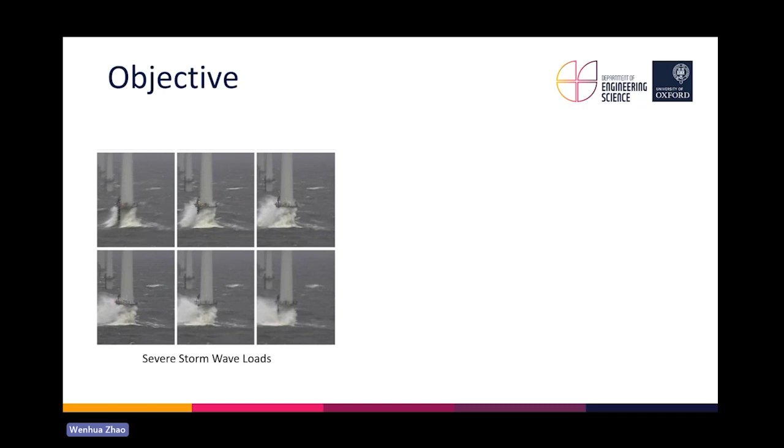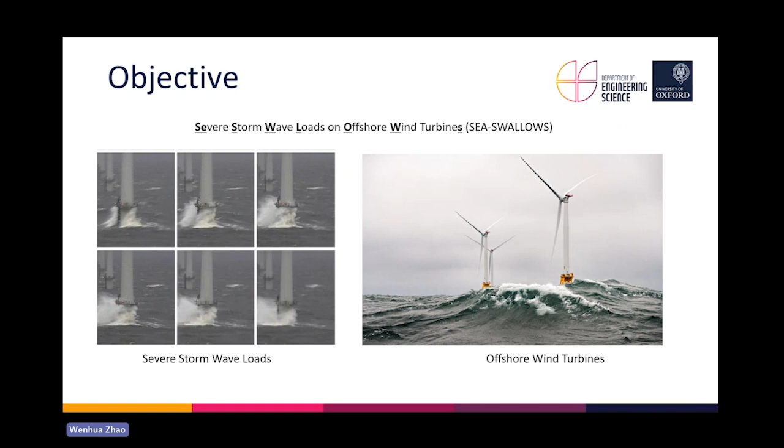Because we are trying to build offshore wind in much deeper water with larger diameters, these hydrodynamic loadings become more and more important. The entire project, Sea Swallows, is really about severe storm wave loads on offshore wind turbines. This is actually quite an established problem, because we have the Morison equation raised probably several decades ago. The Morison equation says quite straightforwardly, if we consider a regular wave, we can calculate the force on a vertical cylinder through a few coefficients: tanh kd, which is the depth correction, and Cm, the inertial loading coefficient, etc. It's straightforward and takes one line to code up.

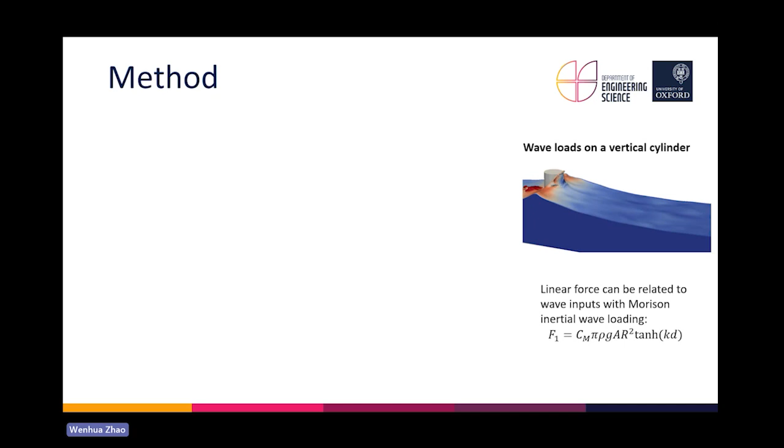And the nice idea behind the Stokes type force model is that this can be linearly superposed. With that being said, we could just add them together. And if we compare the plots, on the left-hand panel we now have our linear force series as well as the second order force series. When compared to the linear force series only on the right-hand panel, we can see that our agreement is much improved. And what's also important is the second order time series: you probably see here on the panel, the frequency is doubled when compared to the linear frequency.

And because all the offshore structures are being designed in the open ocean, we do want to avoid the natural frequency overlapping with the incoming wave. However, the natural frequency for offshore monopile foundations or wind turbines is usually still 2 to 3 FP, which means these second order forces will be really important when you design fixed offshore wind, because they will actually resonate with the natural frequency of the wind turbine, hence causing a lot of fatigue damage as well as contributing to the ultimate load.

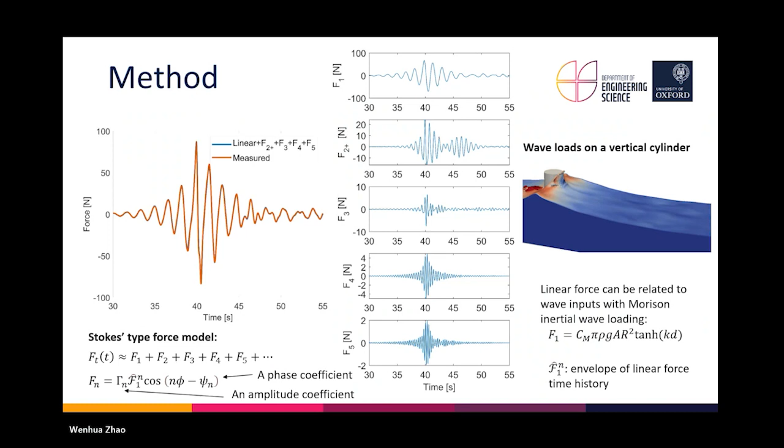Well, if you look at the left bottom corner here, the Stokes type force model can be expanded to quite high orders. So that's the reason why we actually include all these higher order force time series. And if we add them all together, what we get is on the left-hand panel, which agrees pretty well with the measured force. So that gives us quite a smart idea of how we would be able to predict all these nonlinear force loadings based on our linear input. The linear input can either be a surface elevation input, because we can convert it through the Morison equation, but it can also be the linear force input.

So the idea behind the entire engineering predictive tool is that we got our linear forces, and we need to get all the force amplitude as well as the phase coefficients, because each nonlinear term is characterized by an amplitude coefficient as well as a phase coefficient. So if we are able to get all these coefficients up to fifth order, which we believe is sufficient for an engineering type of model, the force model will tell us how big these higher order forces will be, and their phase information depending on these two coefficients. And now, if we add them all together, we'll be able to recover or predict our nonlinear force quite straightforwardly.

But the only problem we have with our Stokes type force model is that we don't know these coefficients. And these coefficients unfortunately vary with different parameters. The first one is the kr value, which relates to the cylinder radius. That tells us how big the cylinder is compared to the incoming wave field. The kd here is actually the water depth, because finite water depth will enhance some nonlinear interactions. And the last one, ka, which you will probably be quite familiar with, is wave steepness. It's a quite classic measure of the nonlinearity of the wave.

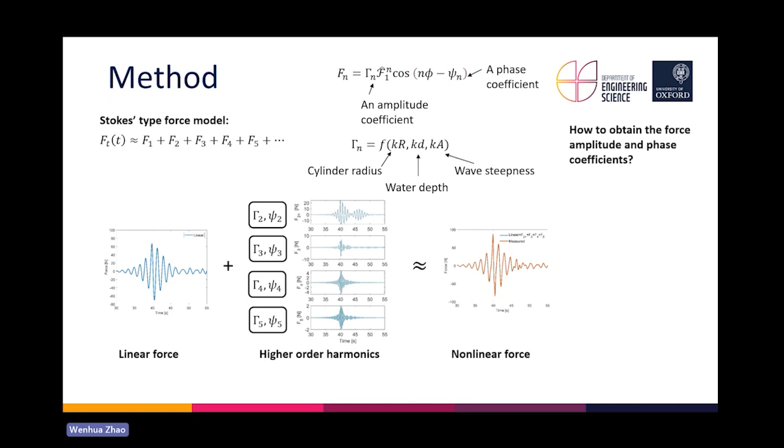Well, in order to really get these coefficients out, we have to do some experiments or numerical simulations. Luckily, we had plenty of experiments going on before our SEA-SWALLOWS project, and we also conducted several new experiments, shown here at the bottom in the background in gray. As you can see, we have quite a lot of experiments, looking at different combinations of kr, ka, and kd that we talked about. But the only problem with these measurements or experimental data is that what we get is already the nonlinear forces, right?

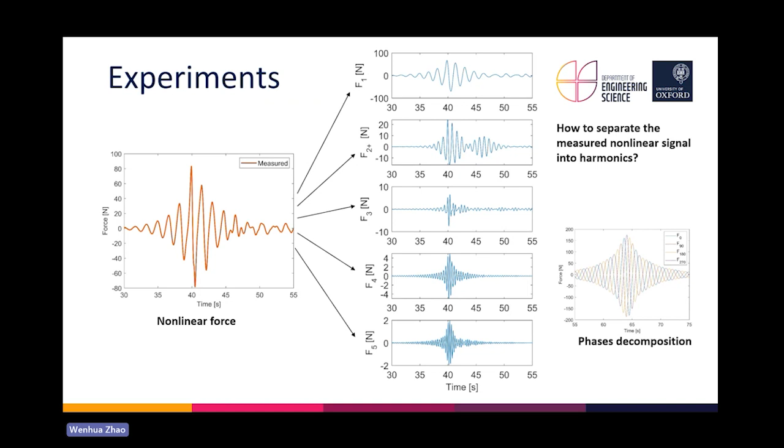So with that being said, we would actually need to isolate or separate all the nonlinear force we get from our measurement into different higher order harmonic forces. Well, this has been done in terms of the four-phase decomposition method. I believe that most of you here have looked at it before, so I will probably skip that a little bit, but basically, if we need to get the high order force components out, we have to repeat our experiment 4 times or 2 times.

And the repeat of the experiment has a phase angle shift from 0 degrees to 90 degrees to 180, basically flipping the entire signal upside down, as well as 270 degrees. And by linear superposition of these forces, as you can see on the right bottom panel there, we will be able to extract all these nonlinear forces out. And because the first order and the fifth order are actually in the same signal time series, we just need to do quite straightforward filtering, because the first order signal and the fifth order signal are really separated apart in the frequency domain.

Well, that's actually quite a neat idea, but there's more to do, right? Now we collect all the experimental data, we separate it into all these higher order force harmonics, but we still need to get all the coefficients out. This is where data-driven methods would actually help a bit, because we can use the linear least squares method, which has been used by previous experiments, but now we reprocess all these data with some nonlinear fitting methods, which is quite straightforward, and that is how the fitting method has been improved.

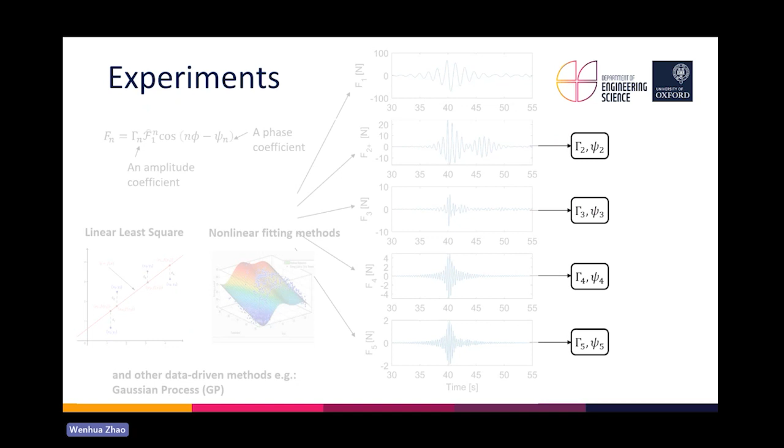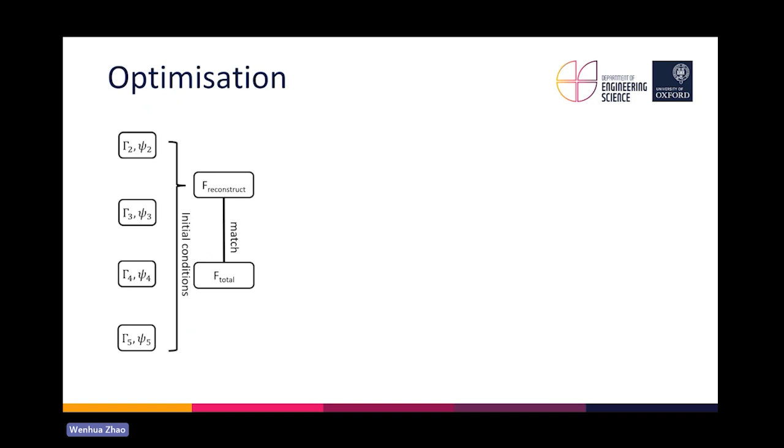But the other thing we could do with state-of-the-art data-driven methods is, because what we really want to recover is the total force, we could actually use some optimization codes. Currently what I'm using here is gradient descent, and the idea is fine-tuning all these combinations of the coefficients to make sure that it predicts the nonlinear force better.

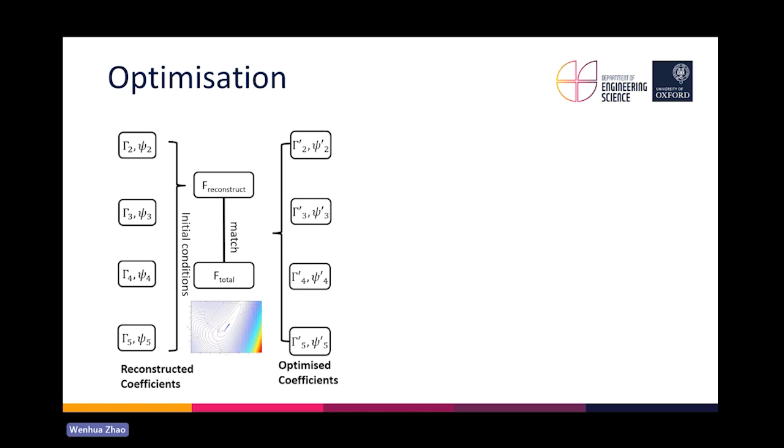Because in previous studies, all these extractions of coefficients are independent. That means if you want to get the second order coefficient, you only know the second order terms, and that's how you get the second order coefficient. But now we were able to combine all these high order coefficients together and do another round of optimization, which actually improved the accuracy on the total nonlinear forces quite a bit.

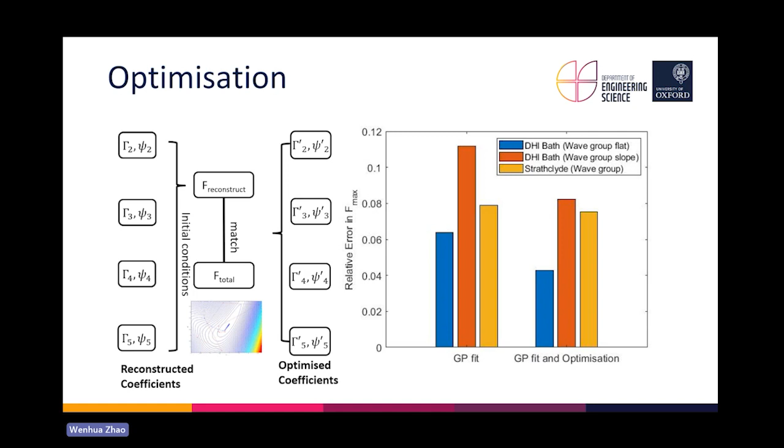So that's the case so far, and then what we do is plot out all the phase coefficients from all the data we have got so far. It's unfortunately a bit messy here, but we do see that for the second order coefficient, which is on the top line here, they vary quite a lot with the Kr value as well as the Kd value, which are in the second and third columns here.

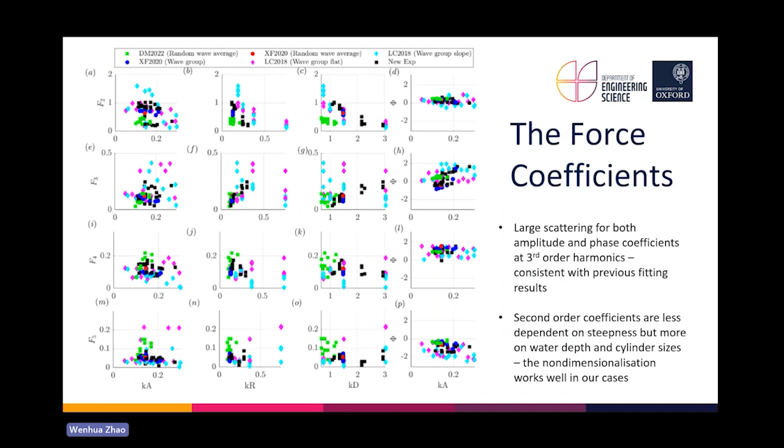So, with that being said, we got all the coefficients, and now that's where the machine learning comes to be applied. Well, the idea is quite straightforward. We've been going through how we can use the phase decomposition method to get the force coefficients from the experiments or from the numerical simulations. Then we basically feed them into a Stokes type GP model, well, Gaussian process model, and once it's been trained, we can just feed in some linear force or wave time series as the inputs.

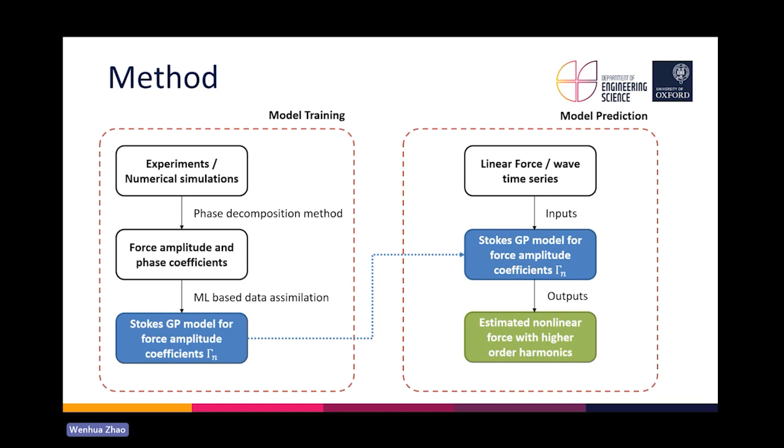Then we will be able to get the nonlinear force output on the higher order harmonics quite straightforwardly on the right-hand side. So there's nothing really tricky about the machine learning process here. We just feed in a bunch of coefficients, the entire model is trained on these coefficients, and the model will be able to predict afterwards.

Well, if we look at some results in terms of the predictions, first we are going to look at the wave group predictions. It's a focused new wave, which I guess you will all be very familiar with. On the left-hand side, this is actually the total force. So on the y-axis is the total force on the cylinder, and on the x-axis is the time vector. Our prediction model does agree pretty well, apart from slightly missing the trough of the force, and we can also see the breakdown of each order of higher harmonics.

Well, we recovered the second order, the fourth order, and fifth order quite spot on. So ideally, the yellow line does agree with the blue line pretty well, but the only thing is that the yellow line does not agree that well on the third order, where we already know that there might be some extra physical process going on.

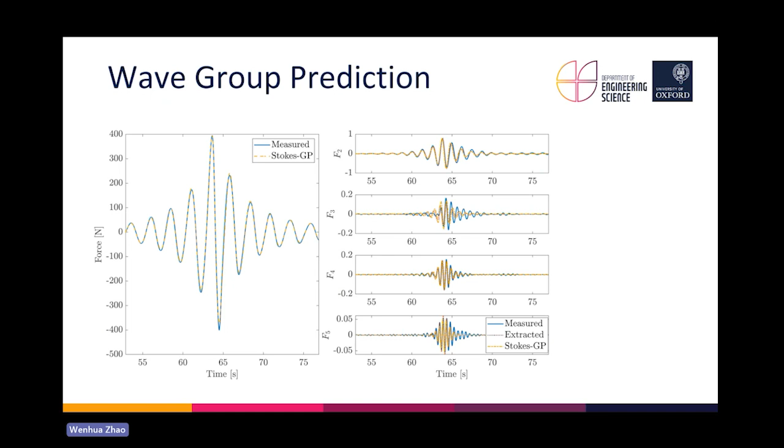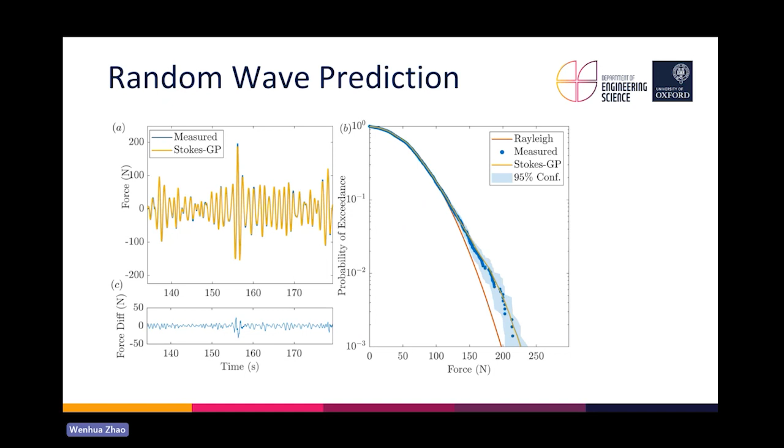And if we look at the force exceedance plot, as we can see here, we do get plenty of nonlinearities when compared to the Rayleigh distribution from our force time results. But our Stokes GP model can quite accurately predict all these nonlinearities, or the higher order forces, in the crest force amplitude here, which is quite nice.

The other thing we would really want to do is, because what we are actually developing here is an engineering tool, we want to know where or when our model actually breaks down. So that's the reason why I've implemented what's called an upper confidence bound policy, which is based on a k-fold cross-validation procedure. In theory, it will give the non-exceedance criteria for the force predictions.

Oops. Well, in terms of the conclusion for part one, basically we are trying to develop an engineering tool for predicting the higher order force harmonics based on the linear signals, and we are able to do that based on the Stokes type theory with data interpolation through machine learning.

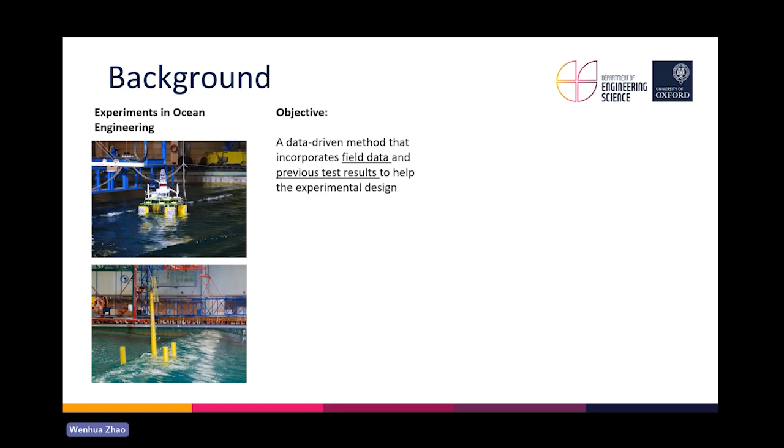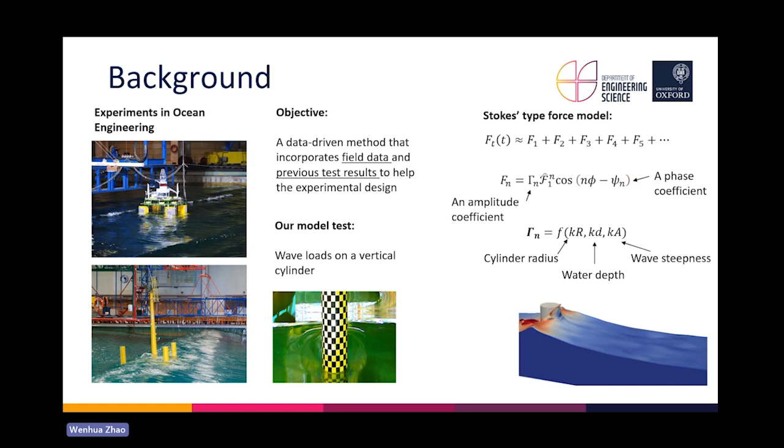And the idea is, can we incorporate some field data as well as some previous test results to design our new experiments? Our case study here is looking at wave loads on a vertical cylinder. The right-hand side bit I'll probably not really go through, but I need to stress that what we really care about is the force amplitude coefficient. And that's depending on three parameters: cylinder radius, water depth, as well as wave steepness.

So how do we design an experiment? Firstly, we would like to repeat some previous critical experimental cases, because all these cases are sourced from different sets of experiments. They might not agree well with each other. So ideally, we would like to place more experiments to check which set of experiments was not that accurate.

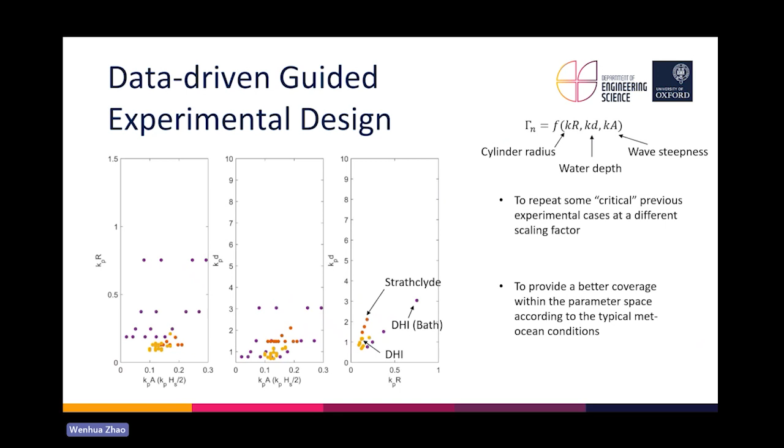The other thing is that we need to provide a much better coverage of the entire space, because we see quite a lot of blank space here where we don't know what the coefficients look like. So we need to do more experiments. And the other really important thing is what's going on in the ocean. If we just ask machine learning what the next best design will be, it will give us an infinitely large number, because obviously very large kRs will never really exist in the ocean.

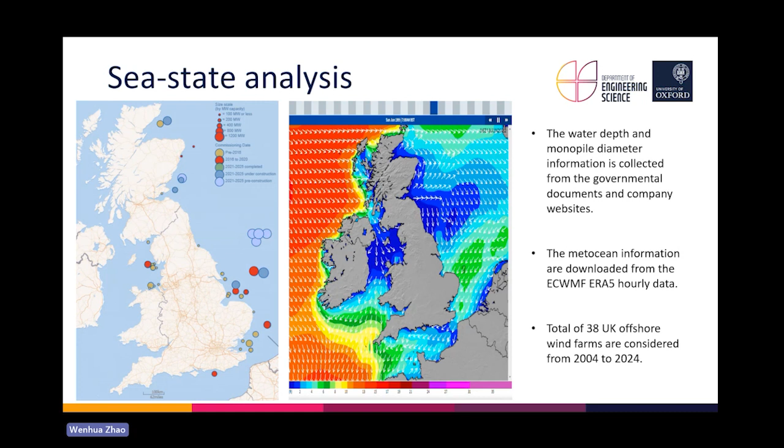That's why we need to look at ocean data, which we adapt from the ECMWF hourly data. We extracted all the information from 38 UK offshore wind farms over 20 years. For each wind farm, we extracted the significant wave height, which is quite straightforward, the Hmax, which tells us the hourly maximum wave height, as well as the peak period, which is a measure of the wavelength of these waves.

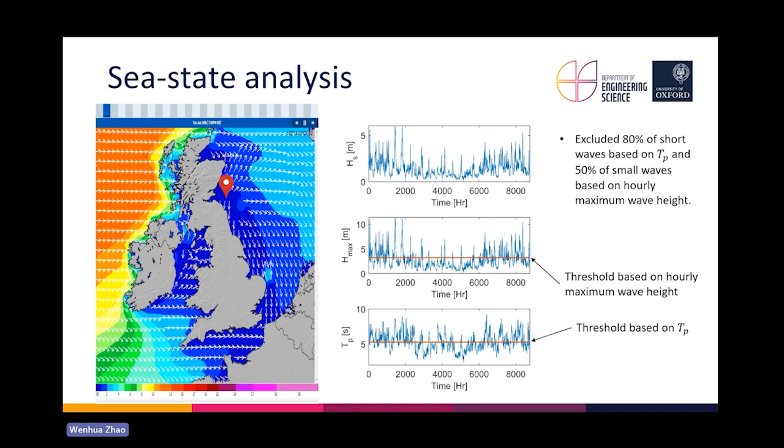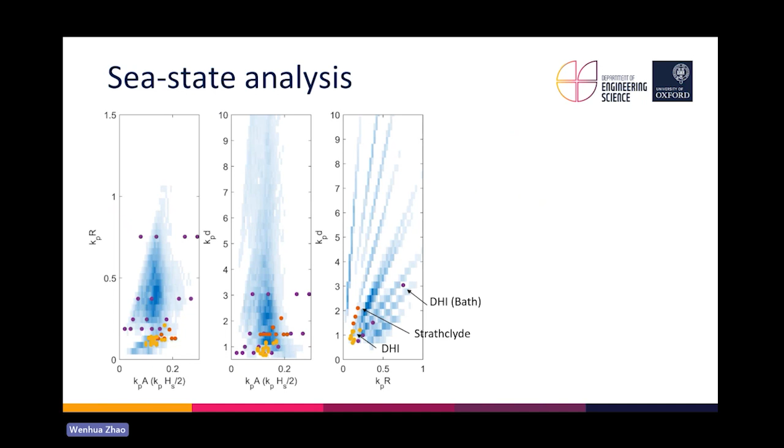Paul does mention that peak period wasn't really a nice parameter, but when I trained the model, that's what I picked, so next time I'll probably do it better. On the other hand, if we look at how this sea state analysis is performed, I've plotted the bin plot here on exactly the same three panels. The dark bluish shows that these combinations happen more frequently in the ocean.

And for any design of such experiment, because we really put a cylinder in the middle of the tank, the first thing we really need to decide is how big our cylinder will be, and that's critical because you can't really change the size of the cylinder during the experiment, because changing it will take a day, which is not an ideal utilization of the facility.

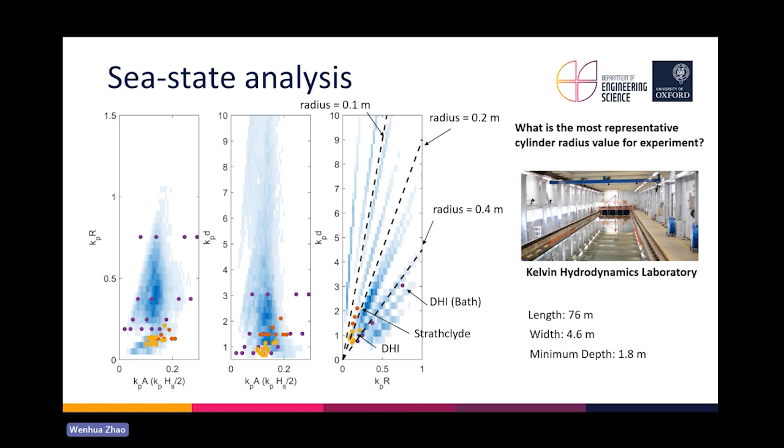So the idea is straightforward, and we do know that there are quite a lot of stripes here on the third panel, which is really because it's the water depth being plotted by the cylinder radius, and both are actually fixed. So we can see all the experimental cases must be done in a straight line if we don't really change the water depth here. And now the question is how we could design our experiment.

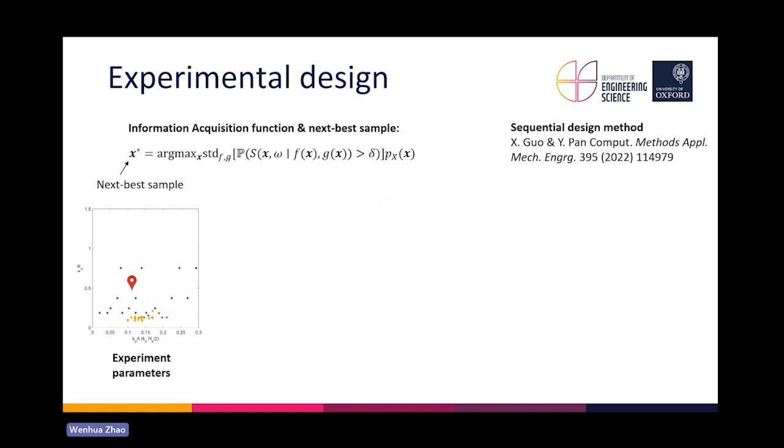The approach I've taken here is called information acquisition function, which is a Bayesian type of sampling idea. On the left-hand side of the equation you see our next best sample point, meaning which parameter combination we should use to do our next set of experiments. And the middle bit is really about the model predictions. There are two types of things we need to consider.

The first one is the model prediction residuals. Well, that's quite straightforward. That's our model error, right? If we got a very large model prediction error there, we might need to check whether our model goes wrong or there might be some uncertainties when we do the experiments.

The second one is model prediction uncertainty. That's also a very standard parameter, because that tells us how confident our model predictions are. If we got far fewer samples or very coarse sampling in a certain area, the model will give us quite a large confidence interval, so that we know we need to place our next sampling close to that point.

The last bit is everything is really being bounded by the sea-state analysis, meaning that what we are going to test out in the tank should be something that really can happen in the open ocean, right? So that's the reason why there are the conditional statistics at the very bottom. And with all this information available, and our information acquisition function, now we will be able to answer the question: what is the most representative cylinder radius we could use in our experiments?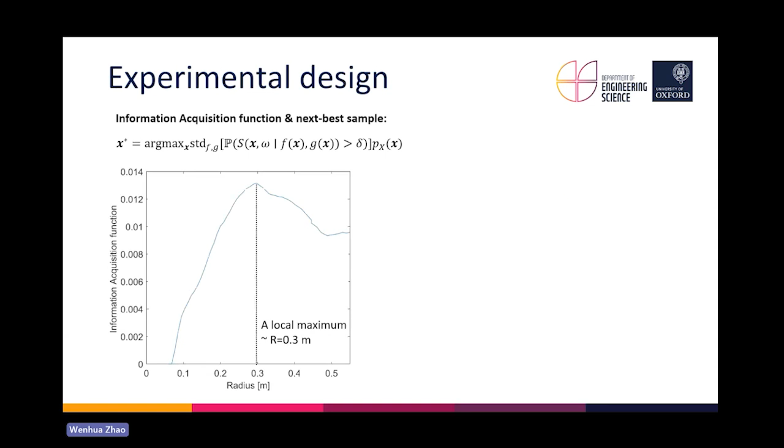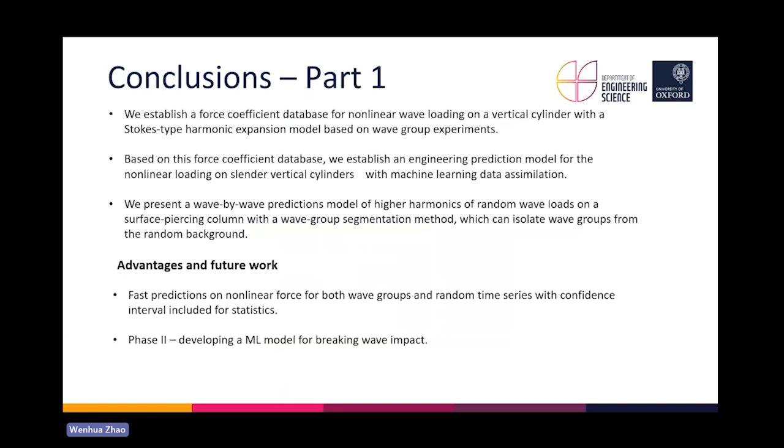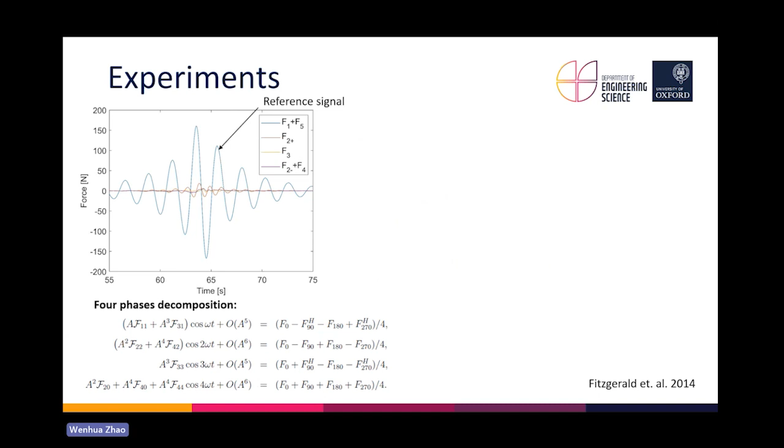Hi, Tim. Really interesting talk. I'm wondering for the first part, how much training did you have to provide the model to achieve the results that you had? So we can have a quick flashback, that would take a bit of time, but if we flash back to the table there, you will see that that's about 100-ish cases. So that's not a big amount of data.

The idea is that the Gaussian process model is already quite a good model whose generalization ability is fairly established for very small data. The other thing is that the Stokes model that we introduced basically simplifies everything. If you just put in four time series and you want another time series result, that would be very demanding for models, and that couldn't really be achieved with such a limited amount of data.

But because now we are really putting in three parameters and asking for one, the entire mapping between the three parameters and our final amplitude coefficient wasn't that tricky. So that's the reason why incorporating some physics in your machine learning model will be really helpful. And to be honest, our machine learning model here is really just used as a fancy way of data fitting.

Yeah, and I guess that answers the second part of my question, which is that the training data is an ensemble of all the experiments together, right? Yes. Obviously you couldn't really use all the data, otherwise you don't have any test data. Sure. So select ones from each experiment group. Yeah, but the entire database has attributes from all these data sets we collected from previous experiments and what we do in our new set of experiments.

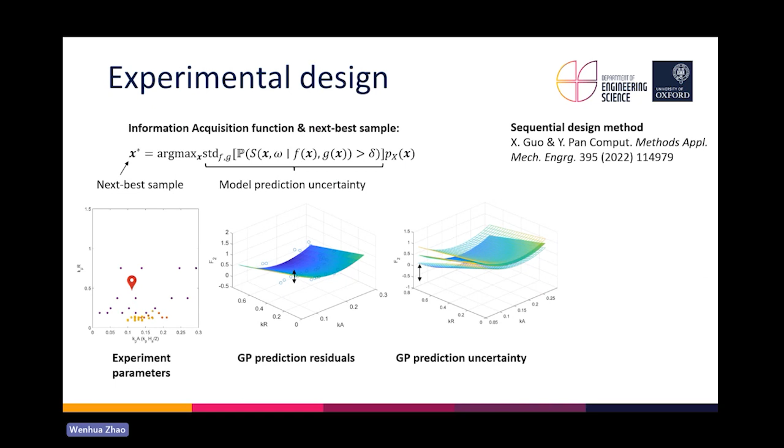But if you just quite straightforwardly take a log value, I'm not saying you should do that, but that's one way you can do that, then everything is focused on the tail. Because if you think of a log scale PDF or the CDF, any difference towards here will be massively enhanced, and any difference toward there is just a small value, so we don't care. Anything really focusing here will be magnified by the log values taken. So that's quite a straight way of how you could sample the extremes.

Well, I guess there will also be many other methods, but those are just 2 ways off the top of my head. Maybe I'll finish with one question, but it's a tricky one, I think. So you mentioned predicting the third order superharmonic forces has been difficult, and you suspect there's some unresolved or unknown physics. Do you have any hunch or understanding of what that might be?

That's actually a really good question. Paul can probably talk you through his insights, but for me, it's certainly something quite consistently shown in previous experiments. And if you think of the FNV model, they also see quite a large disagreement at the third order, although one is really from a potential flow theory framework. But yeah, we are not exactly sure, unfortunately, what the underlying physics is.